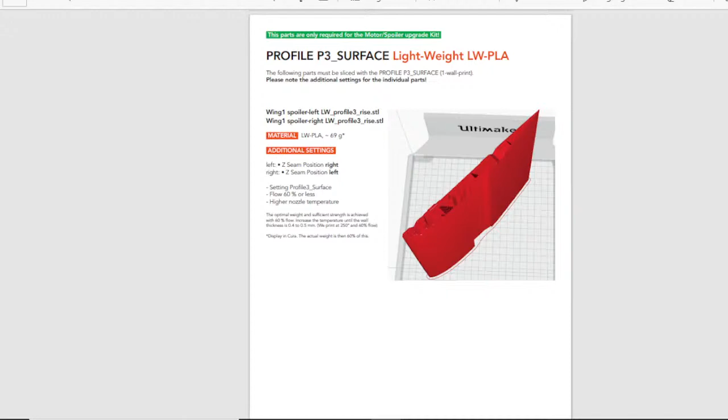Okay? And that is the difference between the lightweight PLA and the full PLA. Okay, and here they're showing the motor, and they even recommend which motors and everything that fit right onto the parts that you print out.

Okay, and here you see the construction of everything, and you'll see here that these are where those clips go. So actually, you're going to have 1, 2, 3, and the tip. You're going to have one more panel besides this. One more panel, and you can be able to take it off. Okay? So, let's go back to the manual here.

And on the nose part, now you see here they're showing this above here, on the airplane. They're showing the above part, and let me see if I can, no I can't. I just thought maybe I was able to show my mouse here, but I can't. But as you see, above the airplane, you see these wing panels, which are the innermost wing panels, and these are the optional wing panels with the slats. These are the brakes. Because when this thing starts picking up speed, you want to slow it down. So these slats come straight up, and they're like brakes.

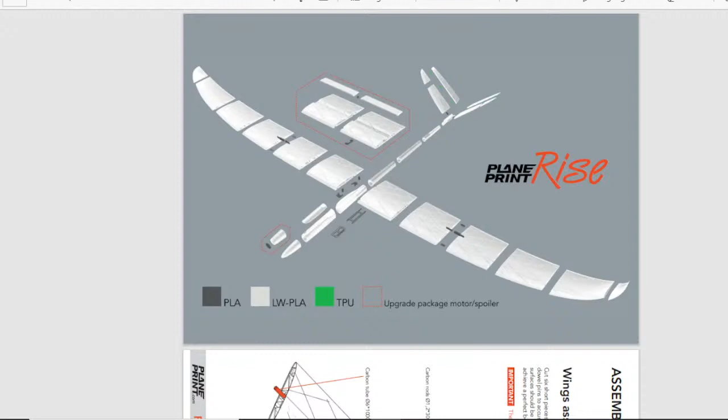Right? So I can show you, actually I can show you one of them. And this is the wing panel here. And I have some cutting out to do here. We'll get a little bit better shot of it here for you. So I have to cut some of this out. Okay, and the slat fits right in like that. Perfect fit. And when you're flying and you want to slow it down, the slat comes right up like that. Okay, and then it folds back down. It's just a brake. That's all it is, your brakes.

Okay, so I just have a little bit of cutting and tweaking, and I have hardware to put in on these, and there's hardware that has to go on the wing, and there's all kinds of little parts. Okay, but yeah. So back to the building manual. There you have the full aircraft. And here you see how the wings have a carbon fiber rod going through the first 4 sections of the wing. Okay? And this carbon fiber rod is 1 meter long. It's half a meter on each side. And that's what really stabilizes the whole wing altogether as a unit. But you can see here that in these wing panels you see all these little pins for lining up, guide pins, okay?

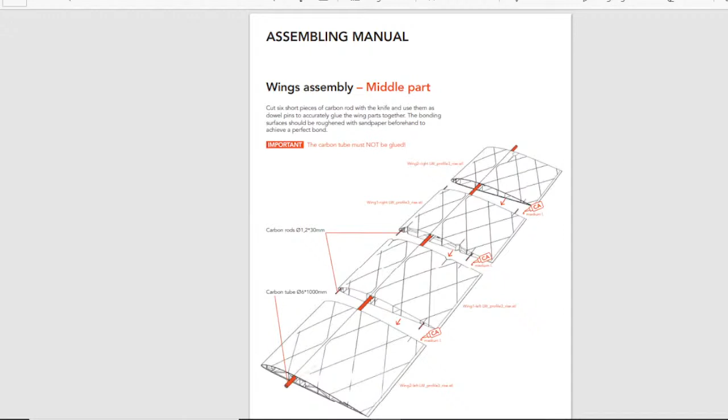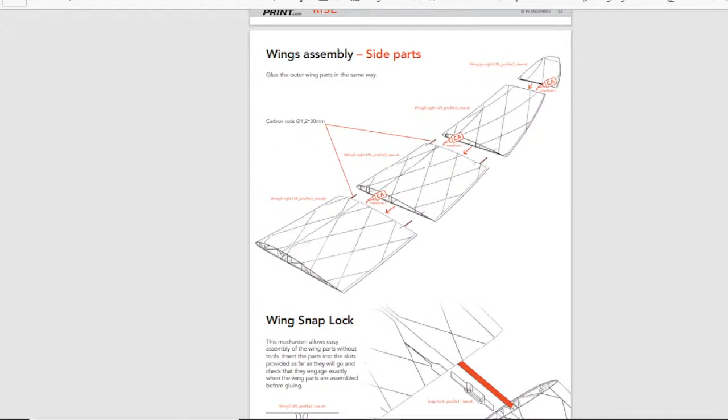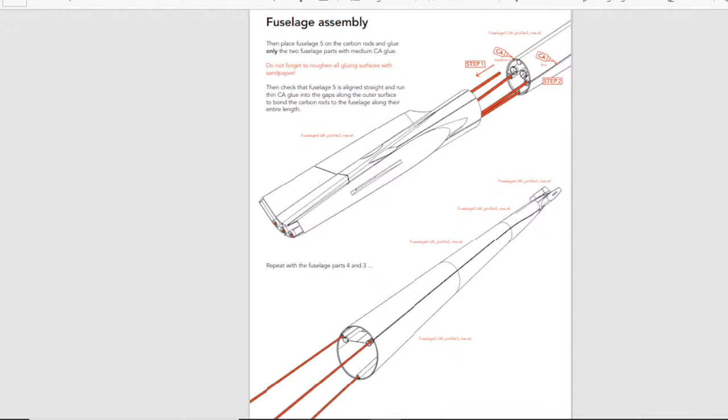And here's the rest of the wing tip. And like I said, I have one more panel to put on this one here, and then the rest of the wing is going to have carbon fiber rod. The next panel that I put on is going to have the clip. Okay? So, let me see here. They're talking about the building materials. And here you see how you start with your tail, and you put the 3 carbon fiber rods in. And here you can see what it looks like when you start putting the units on. And this is what I was talking about. I have the servo tray to slide in there, and then I have the wing mounts to mount in there.

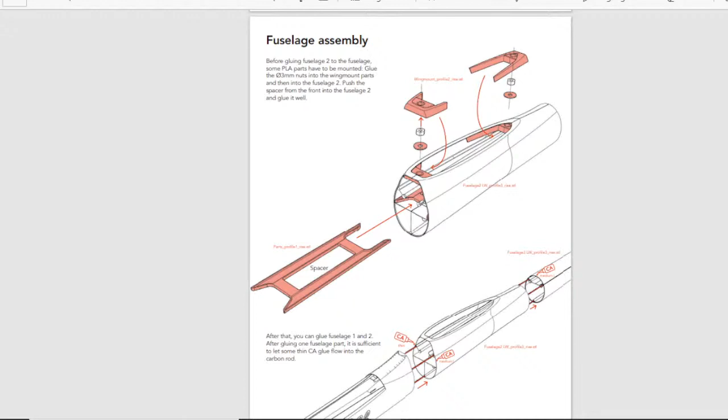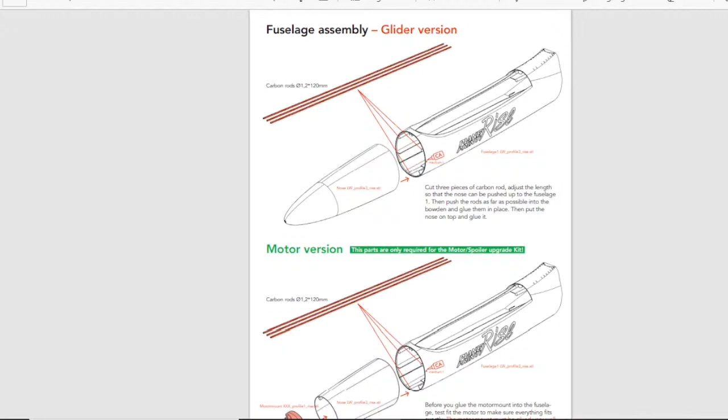Excuse me. So everything goes together. I'll tell you, it goes together like a glove. Everything fits. So I'm just going to click here, because like I was saying, here's the motor, and they're giving you specifications up at the top there, what motors to use and everything, and even which folding propeller to use. That was a 7.5, I think it says. I can't read it. It's too small for me to read, but all this information is on their website. Okay, so

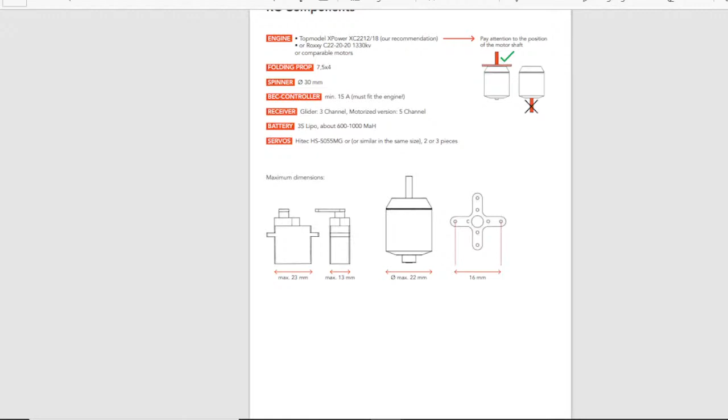this is some more of the materials you're going to need. You're going to need the 6mm carbon fiber rod, which is 1 meter, with a 4mm inner diameter. You need these interconnect connections. These screw into your tail section. You have the horns. Let me see here. I have to find one of them for you and show you. I'll tell you, they're really small.

Just a second. Here we go. I have to find it in my... Like I said, they're really small. And that connector, actually your push rod goes into here, okay? And this is glued onto your tail, the tail section. And it's going to be moving your tail section.

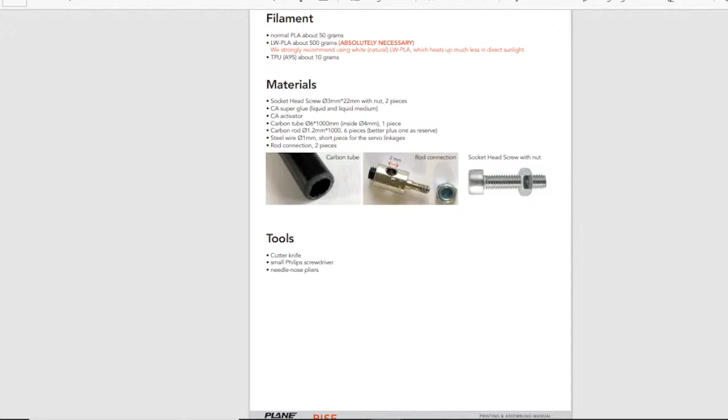And those connectors that I showed you, these connectors here, you can mount these on your servo arm, and then you just put your linkage through the hole and tighten up the screw. So you adjust, really easy adjusting. Okay, and they tell you everything here you need to have for your build. And here it shows the build for all the parts.

Now this here is parts for the spoilers. Okay, and here's those TPU, and the A95 is what kind of TPU it is, which is very pliable. And like I said, it is a lot cheaper to go and buy something like this. I'll bet you these here probably cost $1.50, max $3, instead of having to pay $30-40 for a roll of TPU filament. These are already made, easy. Keep it simple and cheap.

But like I said, go back here to the building materials, and they show you how everything is printed, how it should come out, everything. And it even tells you on some of them where to change the seam to, so that the seam is hidden all the time. Okay? And you see here, let's see if this comes up here, and there we go, skip that ad.

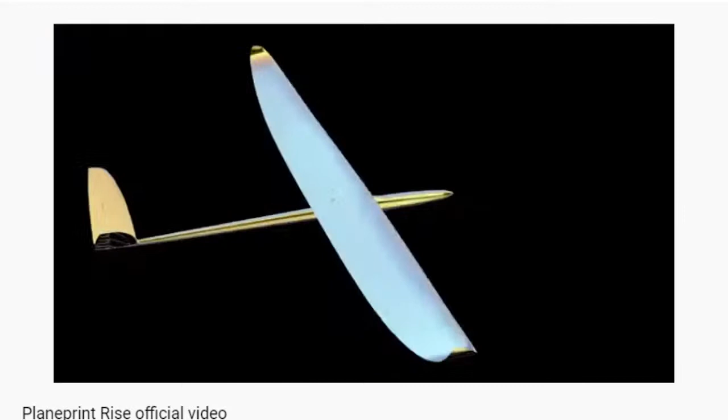And watch this guy flying it here. He's gonna start looping it here. There's one loop right there. And there's another one. And if you think the plane is starting to get too low, you bring it over close to the edge of the hill and catch that updraft and take it right back up again. So if you know how to fly a glider and you know how to take advantage of the thermals, you can literally fly all day, really.

This glider is not as fast as normal gliders. A lot of gliders have flat wings, and they are super fast. And this glider here is more docile. You can see it in the flying. But yet again, you can really put it through its paces. Let me see here. What do we have here?

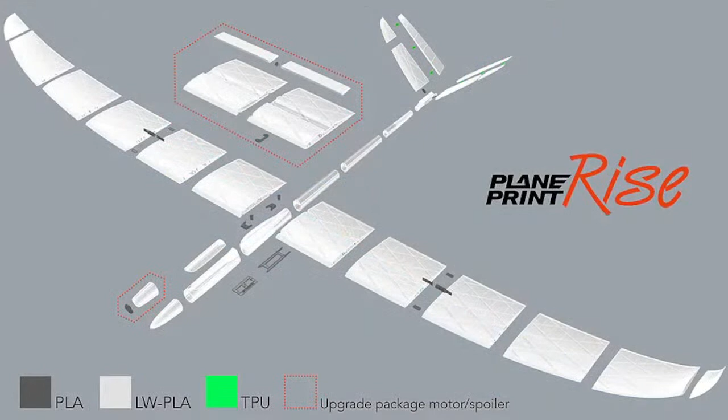Now this is the manual that you download. And this is what I was talking about right here. This is the upgrade with a different nose, because it's a little bit bigger for the motor. And these are the wing panels and for the spoilers. And here's the glider itself. Look here, you can see how the internal ribbing is done.

And I'm going to tell you something. Last week on my video, I took this old piece. This was one of my test pieces. This one was printed at 235 degrees, and I was getting a little bit of waviness in the skin. So I went down 5 degrees, and it looks really good.

So first I took it this way, because this is the way the wing lifts. And I put my fingers underneath where the rib is, like this. And even now, I can't break it. There's no way. The only way I was able to break this wing was to put it sideways, and I used everything I had, and finally it crushed. But that wing, look at that, it pops right back in place.

It is hard. And if you think that skin, watch. That's how hard I have to hit it to make a hole in it. Really. I can pound on it all day and nothing happens. There, didn't do nothing.